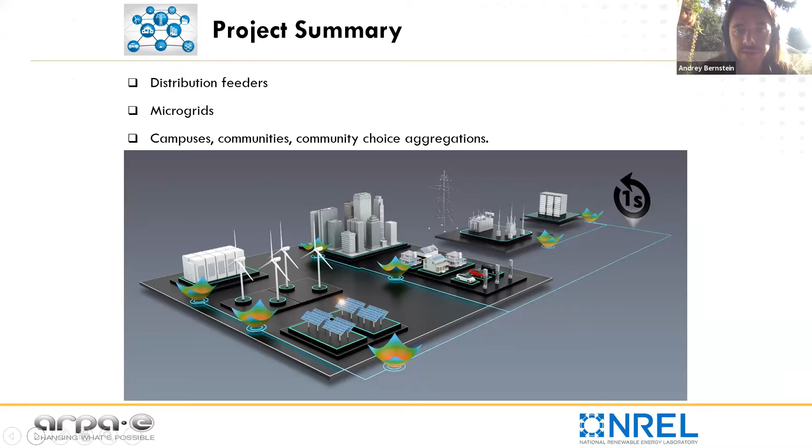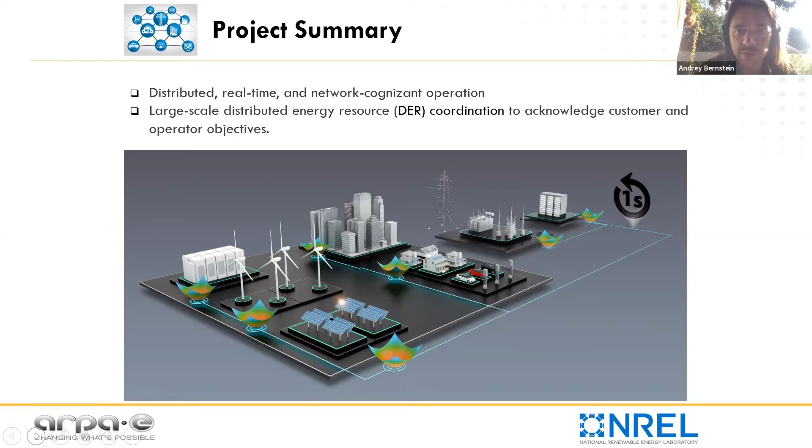So the focus of this project is on distribution feeders, microgrids, and campuses, communities, and community choice aggregation systems. So something that we can call soft microgrids. And if you go to the next slide. And the goal is to enable distributed and real-time operation, which is also network cognizant. And I will explain in a second what it means. And the ultimate goal is to enable large-scale distributed energy resources, or DER coordination, to acknowledge customer and operator objectives. So if we go to the next slide.

And the overall goal is to develop this real-time distributed and plug-and-play optimization platform that will coordinate and operate massive numbers of DERs, with the three main goals: ensuring voltage and power quality, maximizing social welfare, and emulating virtual power plants. And next slide.

So just a quick overview. This project was a collaboration of several institutes. The lead organization was NREL, National Renewable Energy Lab, but we also had Caltech, Southern California Edison, University of Minnesota, Harvard, and University of Colorado Boulder on the team. And next slide.

I will give a bit of an overview of the technical approach. I don't want to get into too many technical details, but I wanted to give a bit of a sense of how we achieve this coordination. So to illustrate this idea, consider this figure here, where on the left you have a distribution feeder that is connected on the right to some node in the transmission system.

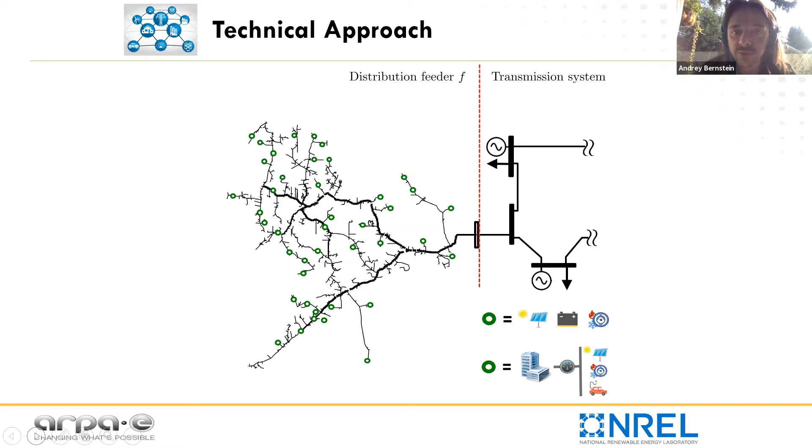And these different circles that you see on the left in the distribution feeder are different distributed energy resources, such as solar panels, batteries, or homes with those devices. In other words, aggregations of these different devices. This could also be, of course, residential buildings or commercial buildings or industrial buildings. And this distribution feeder is connected to some substation on the transmission system as shown in this picture.

So next slide. The overall goal of this project is illustrated here. We have three main objectives with respect to the different DERs and the system itself. First of all, we would like to maximize customer and/or utility aggregator objectives. So individual customer objectives in terms of their comfort, for example, in the houses, or energy efficiency. The second goal is to respect electrical limits within this feeder, such as, for example, voltage constraints, voltage bounds within the feeder.

And the third main goal is illustrated here, the connection point between the distribution feeder and the transmission system, where we would like to provide collectively from these DERs different grid services. In other words, implementing the so-called virtual power plant. So you can think of this point of connection, a point of common coupling of the feeder to the system, as a point at which a virtual power plant is connected, and we would like to provide services such as inertial response, primary frequency response, secondary frequency response, and following dispatch signals. We'll go to the next slide.

And the main focus of what I will show today will be basically the second part. Let me quickly tell you about the first part, inertial response and primary frequency response. Next slide. So the idea really is to take this feeder and create a power plant. The idea is that this whole feeder responds to changes in frequency. Maybe one more next slide. Yeah. Changes in frequency or changes in the rate of change of frequency proportionally, and these proportional coefficients D and M are prescribed by the transmission system operator.

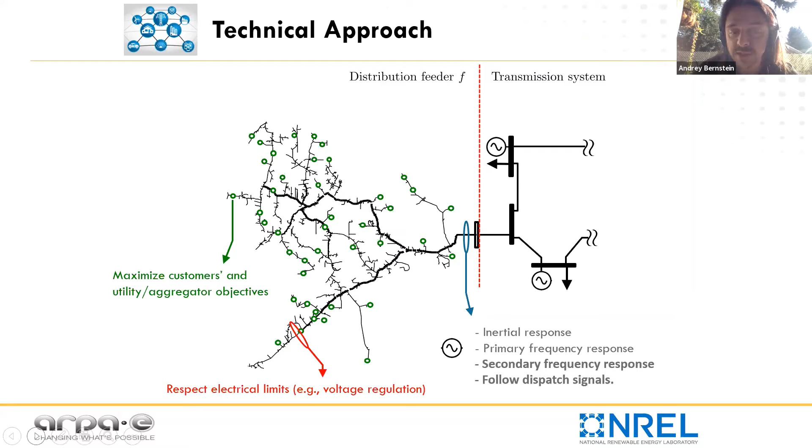So the second part of services is more a slower response. The first is really the fast response, primary response, which happens on a millisecond level or maybe even faster. The second is more on a second-by-second level, basically secondary frequency response, in other words, following dispatch signals, such as AGC signals. Next slide.

And here the idea is to implement this distributed feedback system that I show on the left. Let me explain a bit about these blocks here, but maybe if we go to one more next slide, that will be easier. So the idea really here is that we have this distributed control system where at every house or at every aggregation of DERs, we have a local controller that computes set points to the devices or to the aggregation of devices based on local observations.

And then there is a coordinator that has a global view of the system. It receives measurements from selected strategic locations in this feeder, measurements in terms of voltages, let's say, and the current flows. And it also receives measurements or measures the power flow at the connection point of this feeder to the transmission grid or sub-transmission grid, in other words, at the substation, let's say.

And based on these measurements, the coordinator computes a price signal. So this is a virtual price. It just reflects some constraints within this feeder, for example, if the voltage is violated in some of these nodes, and it sends a price signal to the individual controllers that take this into account when they compute their set points.

And the goal is shown here on the right, it's really a threefold goal. First of all, tracking of signals at the point of connection, in other words, dispatching this virtual power plant, minimizing the cost of individual devices, and also enforcing limits such as voltage limits. And this distributed feedback-based approach is very scalable. It allows you to scale to basically an unlimited number of devices, since you have a distributed computation at each house or at each aggregation of devices. So this is, yeah, next slide.

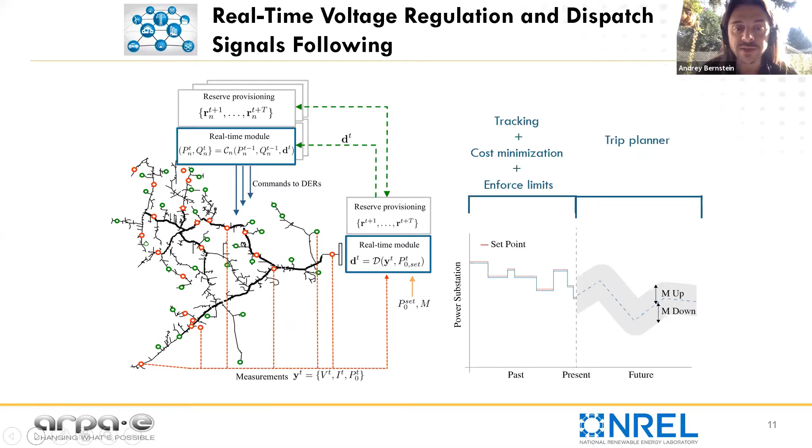So what I want to focus on in the last part of the presentation is really what we did with this approach. We went from algorithm development towards validation and demonstration. And we had a three-stage validation and demonstration. First of all, we had what we call power hardware in the loop. So what you see here, PHIL, is short for power hardware in the loop. The hardware in the loop validation is performed at the lab at NREL here.

And the idea of this power hardware in the loop, or PHIL, for those that don't know, is that you can have real devices such as solar inverters or batteries connected through a co-simulation framework to a simulator of the network, and also connected to actual physical controllers. And you can emulate a real system in a lab environment, but you actually have real devices you can control.

So in this experiment, we had a real feeder from Southern California Edison. By real feeder, I mean a model of that real feeder simulated in a real-time simulator. And we also had hundreds of devices in our lab that were connected to this feeder. At least 100 were actually physical, and hundreds were simulated or emulated.

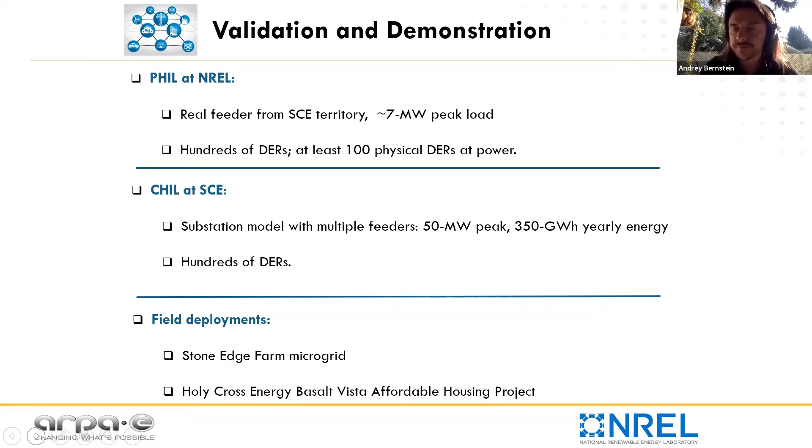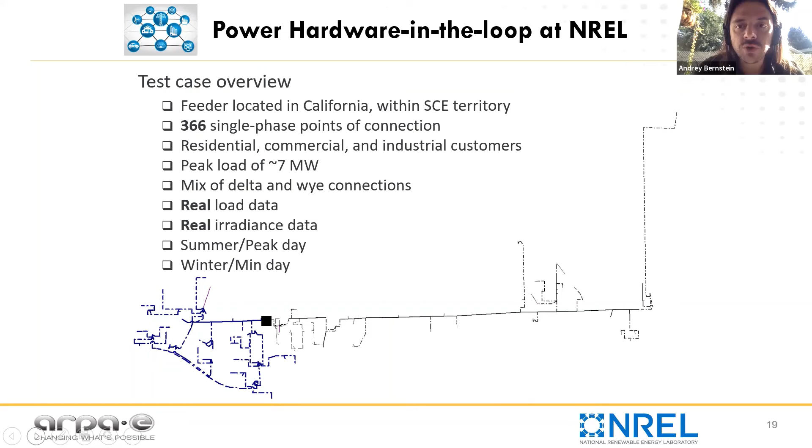So quickly, I will go over these parts. I don't know how much time I have left. About 4 or 5 more minutes. Yep. So let me go quickly here on the results. I will not go too deep on this, but we can go to the next slide.

I guess this is a description of the feeder we had at NREL. We also considered several DERs, as I mentioned. So what are those DERs? These are solar PV systems with different types of inverters and microinverters, batteries, and electric vehicle charging equipment. And overall, we had more than 51% penetration of renewables in this feeder, and as I mentioned, over 100 controlled actual devices. So the next slide.

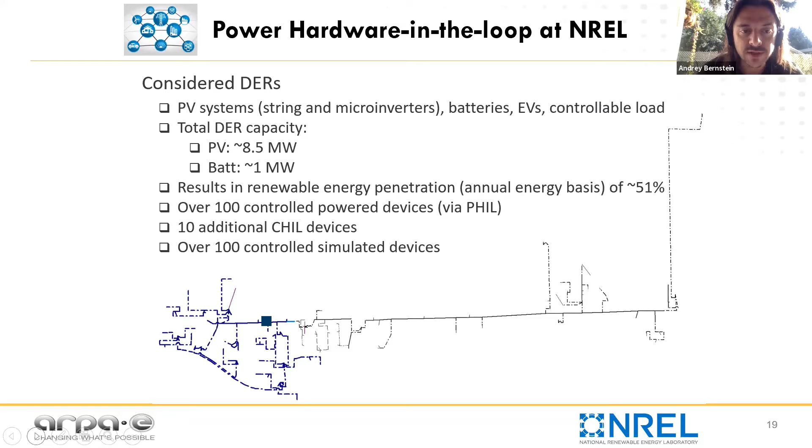So here it gives you some idea of how this PHIL or CHIL setup looks like. You have in the middle the network simulator, which is a real-time power system simulator. On the left, you have the actual racks, we call them the actual devices connected to the simulator. We also have actual physical equipment like charging equipment that you see down there. And actually each rack represents a house.

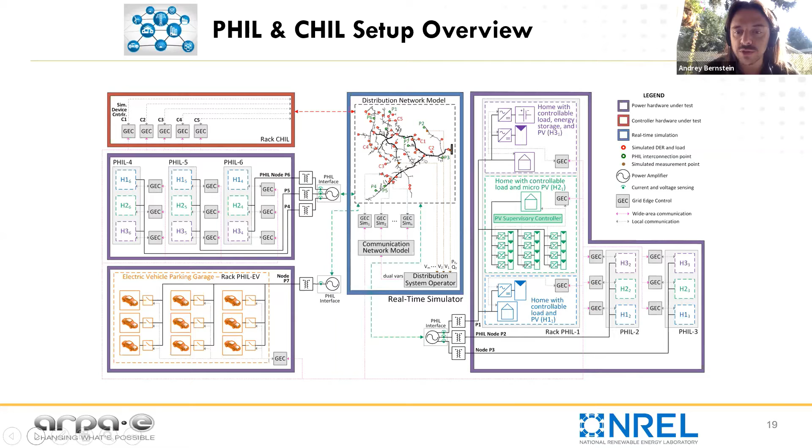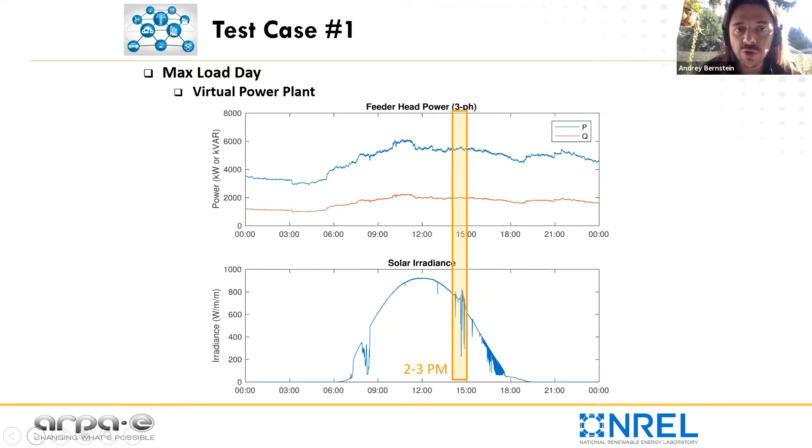So in this house, you have a solar panel, a battery, and an emulator of the load of the house, and so on and so forth. So next slide. Yeah, this is just the list of the devices. We can skip this one. So here, the next couple of slides will just show some of the results. Again, in the interest of time, I probably will skip several of those slides, but it is just the idea of how this entire system operates.

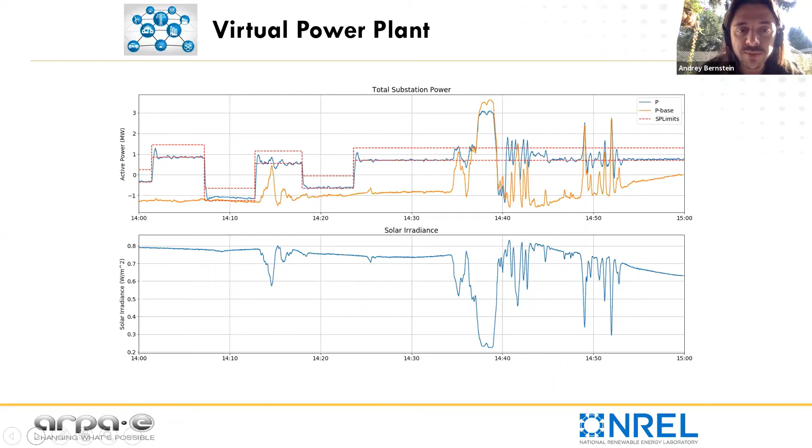And here, for example, on this slide, you can see how this feeder that we had with actual devices was able to follow a given prescribed signal. The dotted line is the band in which the aggregate power of this feeder should be. And you can see how most of the time, using these coordination algorithms that I explained before, the feeder was able to be dispatched to this band of aggregate powers during the day. And in some areas, it was not able to follow this signal because there was not enough flexibility in the feeder. Yeah, you can go to next slide.

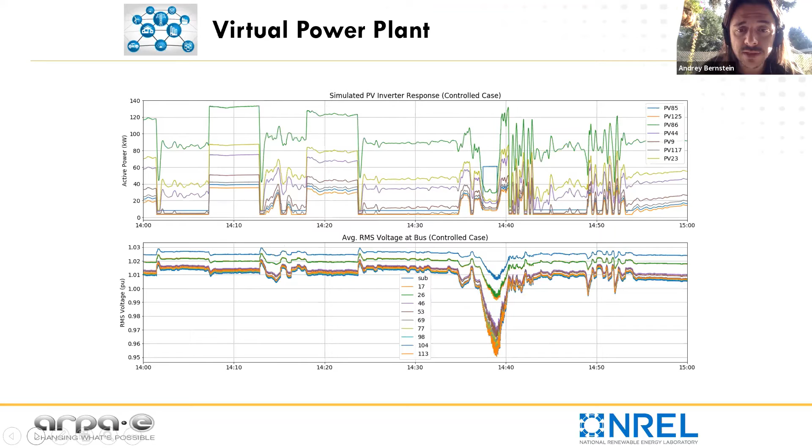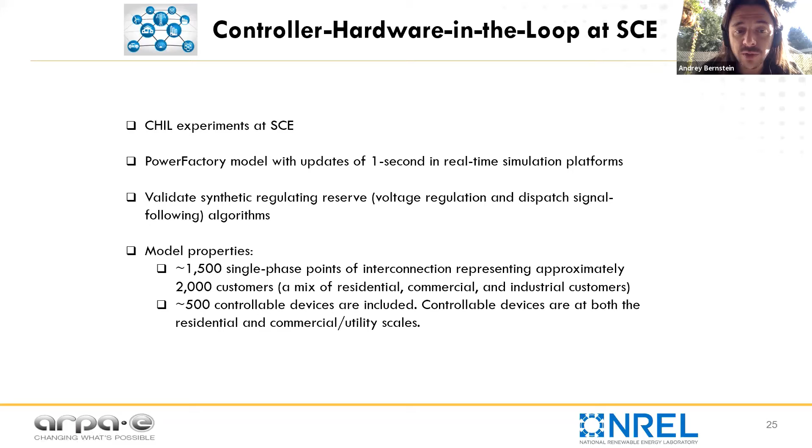Let me see, maybe we can skip a couple of those slides. Let's wait a bit here. So the next, as I mentioned, was the experiment at Southern California Edison. That was not a real experiment on their real feeder, but it was in their laboratory. But we had the opportunity to scale this approach to the entire system that they have there. Maybe we can go to the next slide. So these are the details of this system. As you can see, we have a peak load of 50 megawatt, and we have also at least 50% renewable penetration. Let's go to the next slide.

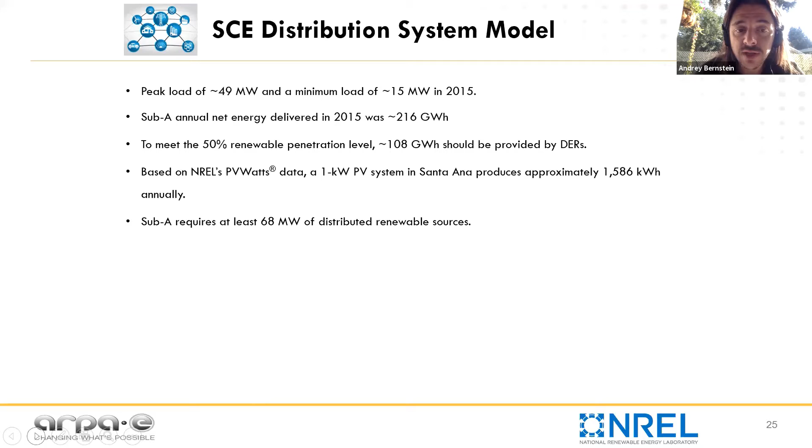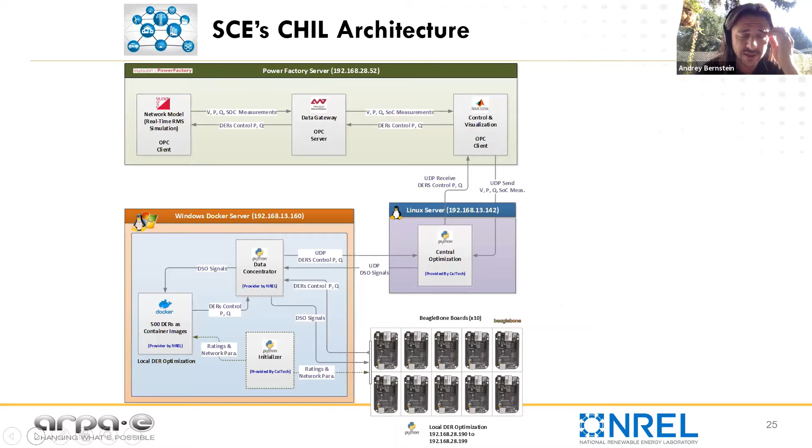So unfortunately, I don't have too much time, but there are also the other 2 demonstrations that we made in actual systems in Stone Edge Farm. Stone Edge Farm is a winery in California. It's actually like a test bed to do different control algorithms. And we had there 20 assets to control. Similarly, solar systems and energy storage, electrolyzers, and gas turbine controllable loads. If you go to the next slide,

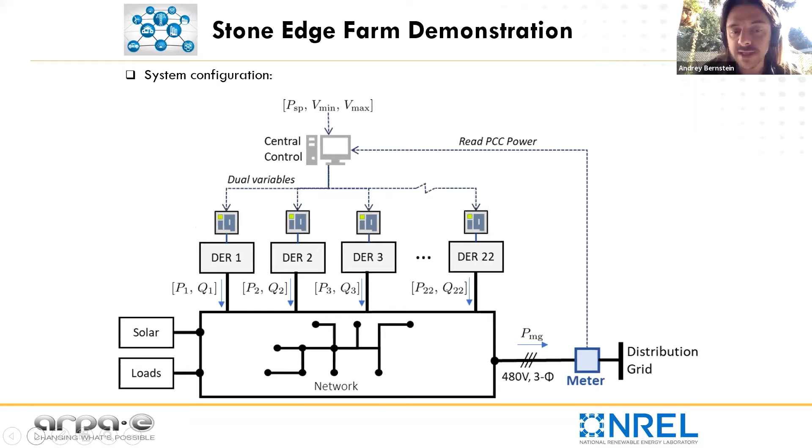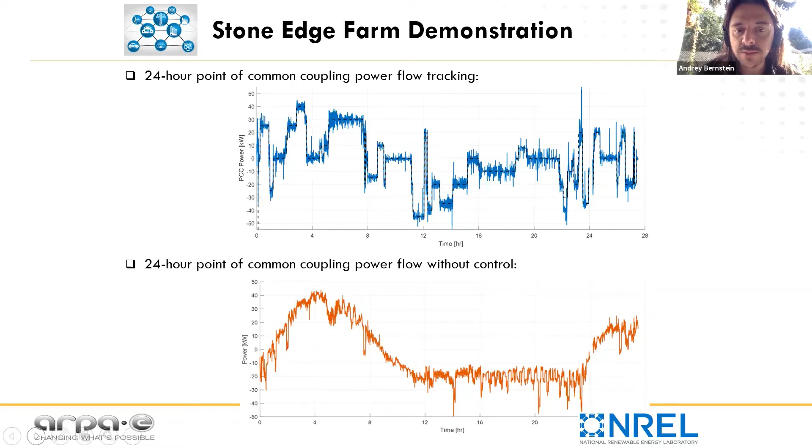The final demonstration we had, and this is also ongoing in other projects that we are pitching to DOE in future, is a very special experiment in the Basalt Vista housing project. This is a project with Habitat for Humanity that was built for local workforce, for teachers and other people that support the tourism in the area of Aspen in Colorado, which you can imagine is a very expensive area. And this specific neighborhood was built for people that cannot afford to buy $1 million houses.

And that was also an opportunity to build and design from scratch all-electric houses with rooftop solar, energy storage, electric vehicle charging, and smart appliances. Next slide. And the goal was to demonstrate how we can use these mechanisms, as I showed before, and help the distribution utility to control and coordinate DERs to provide value to the grid, as well as to satisfy the individual consumers.

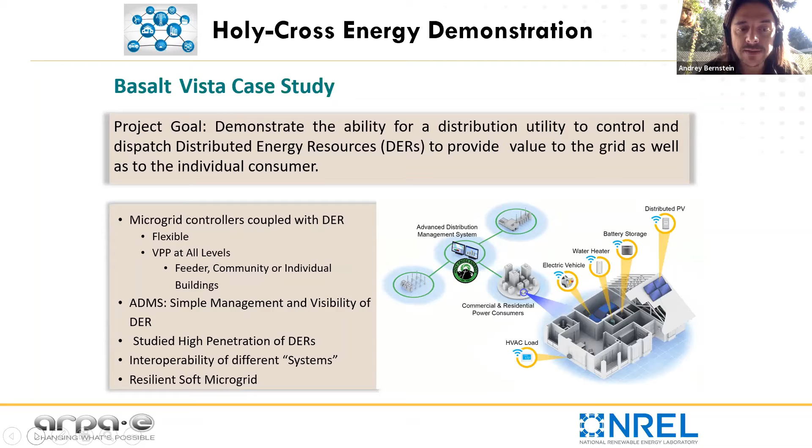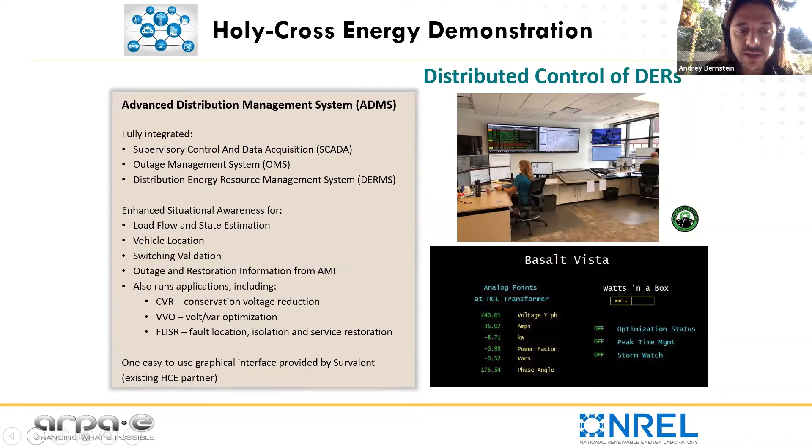We can go to the next slide. That was fully integrated with a given ADMS system. Again, if you need more details, I will be happy to answer. Next slide. And this is just a snippet of results that shows how we could perform several tasks in terms of overall system performance, such as peak load management and optimization. By optimization here, we mean that we were trying to create really a net zero community with zero exchange of power, which was of course not always possible, but we tried to get as close as possible.

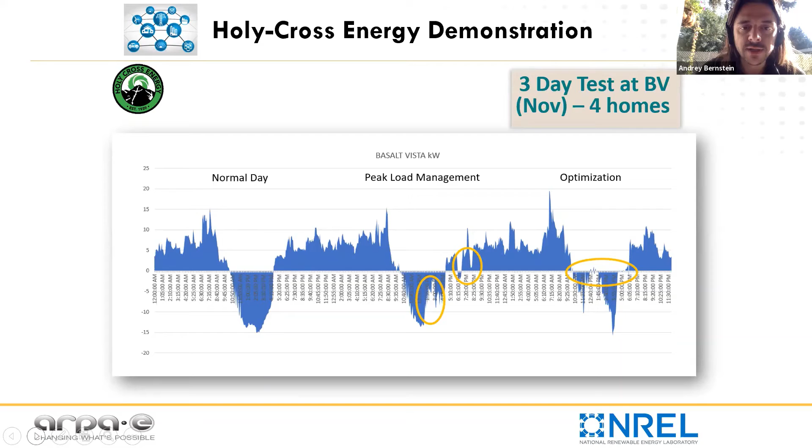Let's go to the next slide. We can skip. This is just zoom to those specific areas. I think we can skip those slides. I guess in the interest of time, I will stop here because I think we are a bit out of time, but I will be happy to answer any questions.

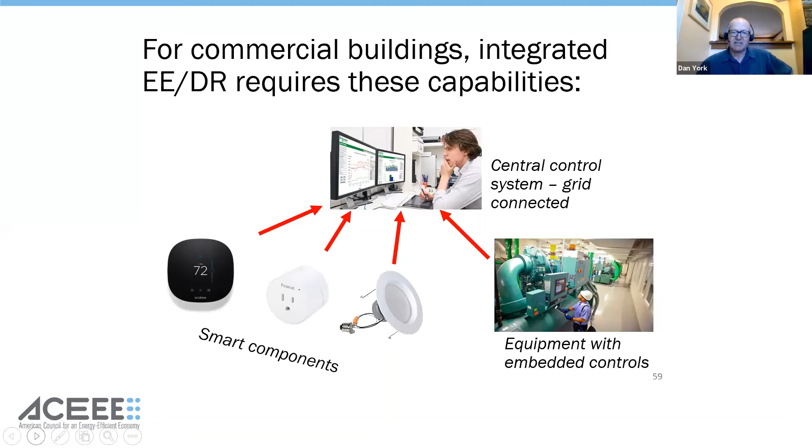Next one, please. And so, I've been at ACEEE 20 years, and one of my first projects was looking at the idea of integrating energy efficiency with demand response. That was research long ago, and many people recognized that that was a good idea back then. So, fast forward, and we did this research project just to see, well, what's exactly out there.

So as we looked at these programs and tried to develop some kind of classification scheme, we realized that we really saw 4 relatively distinct levels of integration. Level 1 was just recognizing that each type of program has benefits and capabilities for customers, but really not much, might inform a customer about something, but not really well integrated.